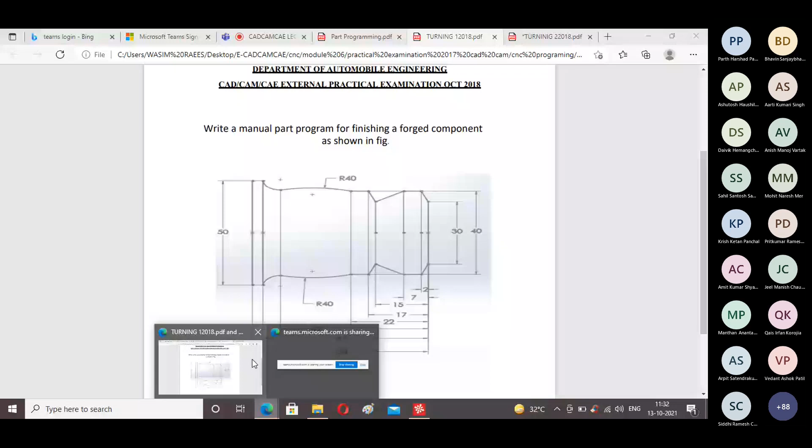I can mark it by the pen. X30 will come, right? See here, diameter. I'll connect the line so that it is better for understanding for all of you. Right? Yes sir, okay.

Yes sir. G01 X30 Z minus - X30 Z -15. Okay, yes, so sorry, -15.

G01 X40 X40 Z -17. Others can please check.

Okay, Parth is giving the right answer or wrong answer? Okay please, next Parth. G01 X40, X40, Z -22. No, but it is not an incline line, right?

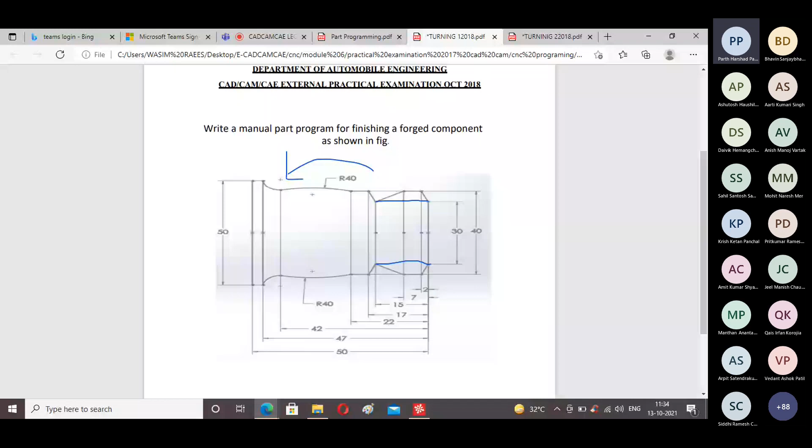Yes sir, G03, G03. What is the X value? X40 will come sir. X, how much is this? 40.

Okay, you can connect like that. Okay, yes okay, X40. X40. R how much? R, what is the value of R?

What is the value of R? 40. R also 40, okay, very good. R40, very nice. What is the value of Z, minus how much?

-42. 42, this one, right, this one is it. Correct, right? Yes, one sir. 42, so you can see here 42. Okay, after that,

G01, G01. Is there any change of diameter? Yes, again the radius - again the radius like that.

Okay, so G02 will be 2. No sir, not 2. G02, yes sir, G02 - it's like a clockwise direction, right?

Yes sir, G02, G02 R5 will come sir. What X will come? R5 will come, first X has to be written - X50 will be it, and R5, radius 5 will be it. R5. What is the value of Z?

Z -47. Others are understood now. Others are understanding what we are doing. Yes, everyone. Yes, sir. Yes, sir.

We are going a little fast. Within 5 minutes I have written down the program also, with the help of you, so try to understand. Wherever you feel any kind of difficulty, please let me know. I will stop, no problem.

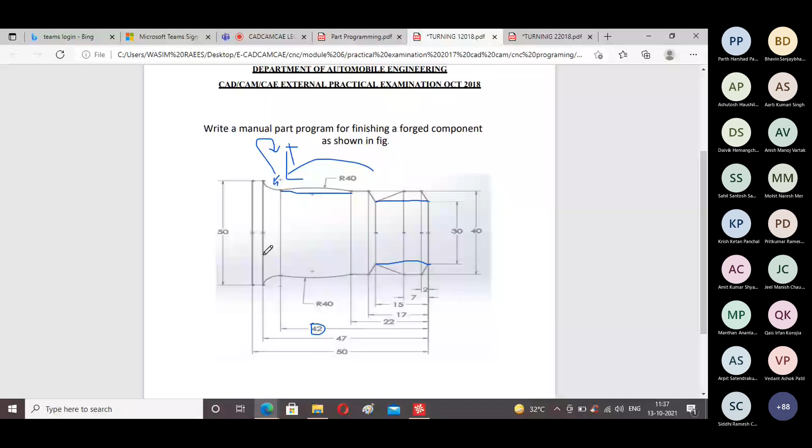I have selected the machine first, that is the ISO Turning. Here I'll go to the solid animation. Let us see, zoom out. I'm using the tool, let us take a little less diameter.

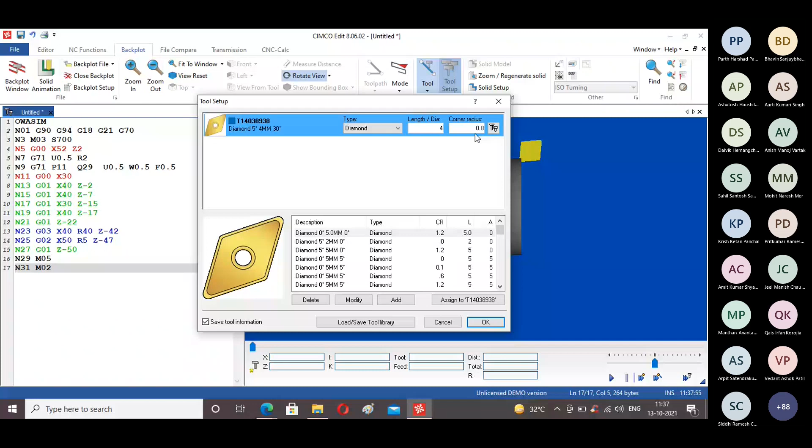Because if length and diameter will be less, it is good, since here the very minor things are there. Solid setup, I'll take 52. Is it okay? And 52 length is not required, only 50. This is 0.

Okay, I'll make it zoom out. Everyone, I have taken a little less diameter or length of the tool because here very small diameter is there. Let us understand if we did right.

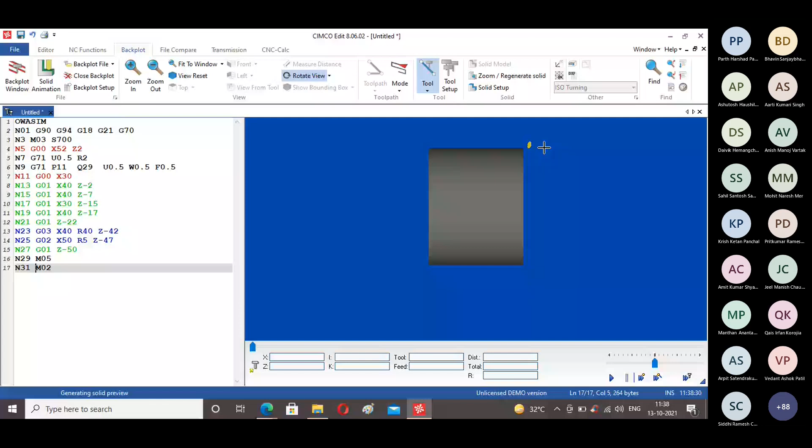It is the animation. Is it okay, everyone? Yes sir. Or anything wrong in that? No, right? No sir.

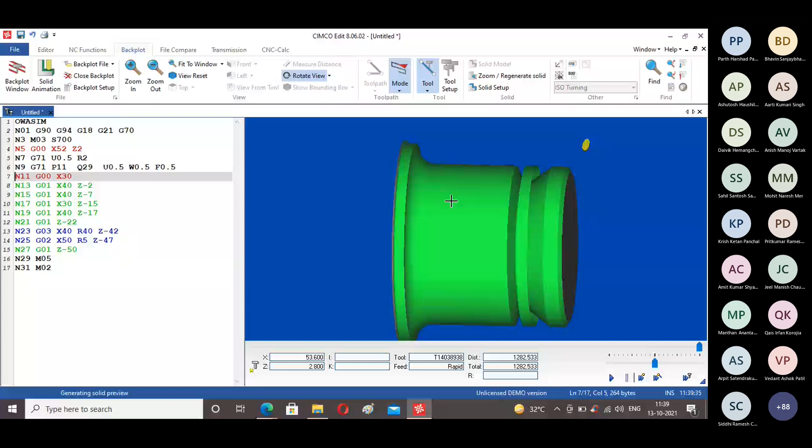Okay everyone, this is okay to all? Yes. Or anyone, see how much time it will take. Only takes 9 minutes.

Okay, once you understood, you can write down the biggest problem also. See how it is difficult, but it takes only 9 minutes to solve this problem. Okay, so try to understand in such a way.